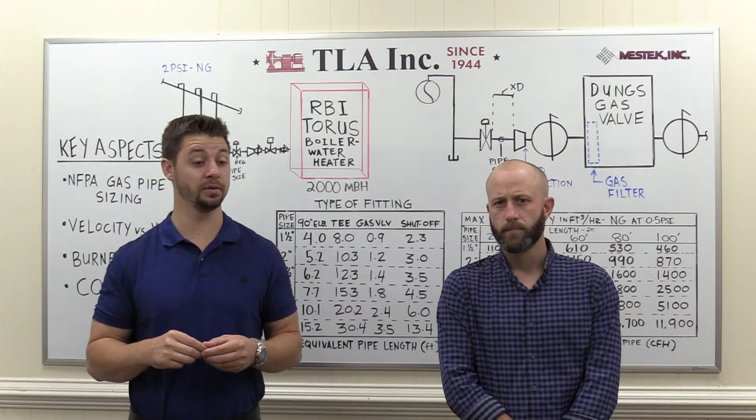We're here to have a quick discussion on some things to keep in mind with gas regulator location when it comes to boilers and water heaters, but also some things to keep in mind with gas pipe sizing and how some of that has an effect whether you have the regulator too close or too far away.

Some things to think about, and stuff that's provided actually on our IOM, are these tables and things that are provided even within NFPA. So we all have access to code and how we size gas pipe sizing, but I think sometimes we get led astray when it comes to equivalent pipe length.

So if we had a 2000 MBH boiler or water heater, we quickly can go to the table and say, hey, I have a 2,000 MBH input boiler. Okay, maybe I only need a 2-inch pipe size.

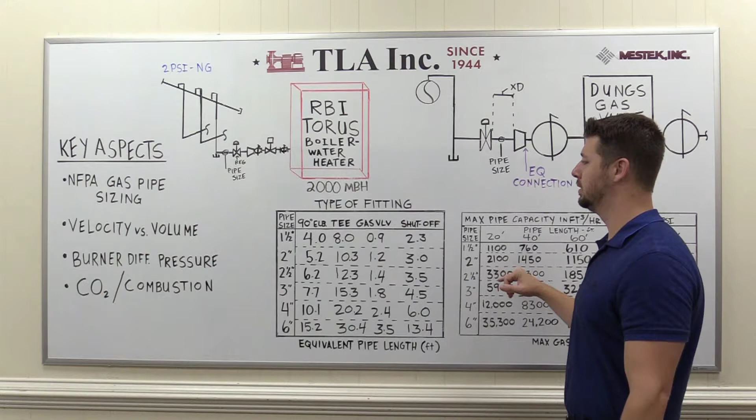But say you want to locate these regulators on the opposite side of the room, run it over, have a drip leg, and then run into the boiler. If we go to our tables, it's just something to keep in mind that we quickly think we only need a 2-inch pipe, but with these equivalent feet, a 2-inch pipe, we can quickly eat up equivalent feet, and we could quickly have to go to a 2.5, potentially 3-inch pipe size.

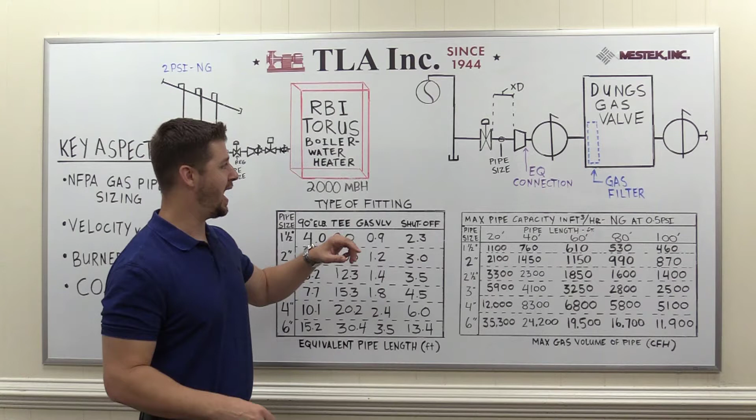Alternatively, if we put the gas regulator too close, there are some other effects that can have on our system, and Ken's going to quickly speak to how that affects things.

The way the Dungs gas valve works is a neg reg gas valve, so we have a blower pulling the gas and the air through the valve. So if we have our regulator too close, we could actually possibly starve that valve. That valve can handle 3 inches up to 14 inches of water column, but also can only handle about a 2-inch drop across that valve.

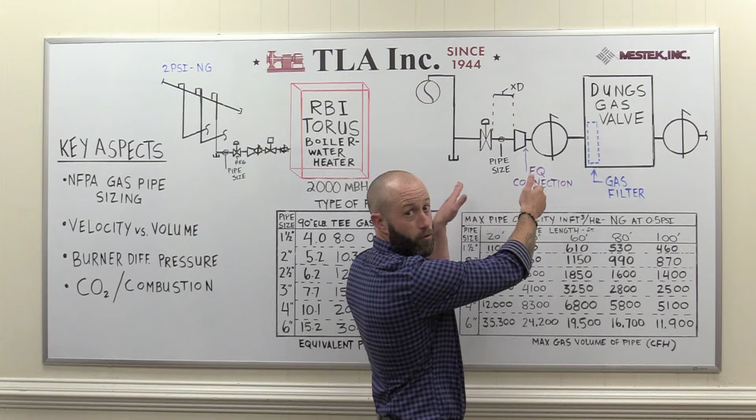So regulator location is extremely important, and what we recommend in the IOM is to be about 10 pipe diameters from the gas valve, so we make sure we have enough volume in that pipe in order to fire these boilers. These boilers typically fire between 30% and 40% firing rate.

So, like you said, keep in mind 10 diameters downstream of the regulator is what we want to see before we hit this gas valve.

Another thing to keep in mind is why that's also important: gas piping is traditionally pretty dirty pipe. It carries a lot of debris. I don't think the city of Richmond or anywhere else is cleaning their gas pipe or purging it. There's a lot of stuff that floats through.

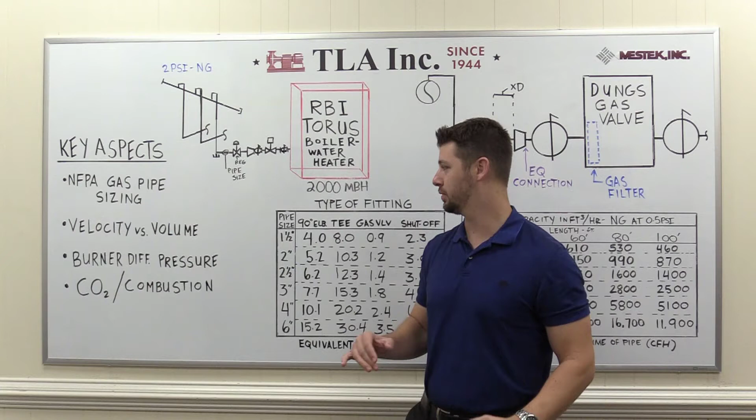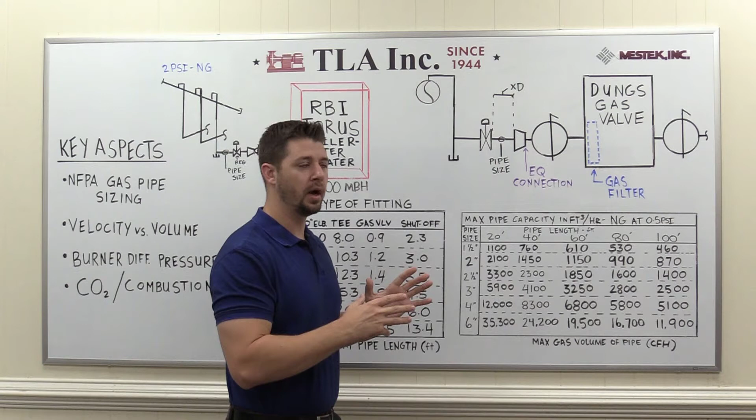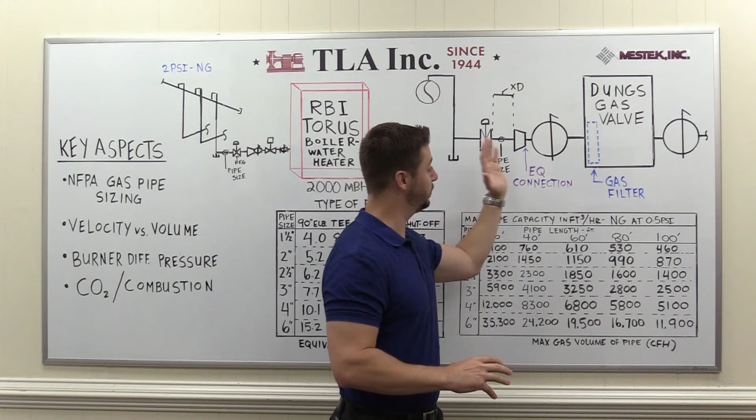So a lot of times in some gas regulators, we crank down on a spring, and when we have this regulator too close, what we're doing is making up volume with velocity. This regulator is trying to catch up quickly to what this gas valve wants, and what happens is we start increasing velocity. We start carrying debris downstream, and we can quickly plug up this very expensive gas valve.

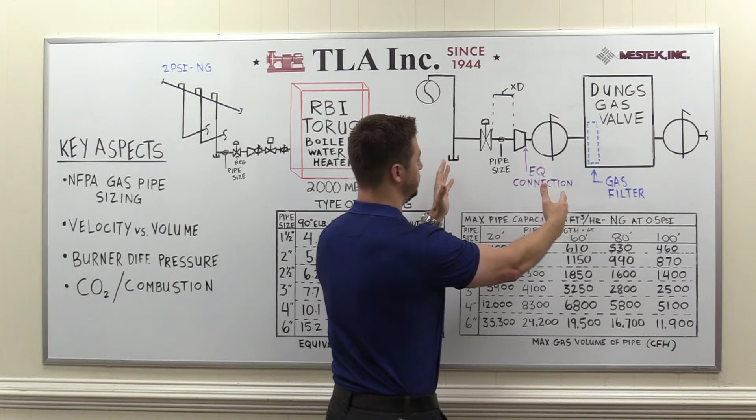Just another aspect to keep in mind of why we want so much volume, i.e. in terms of pipe diameter, downstream of the regulator before our gas connection.

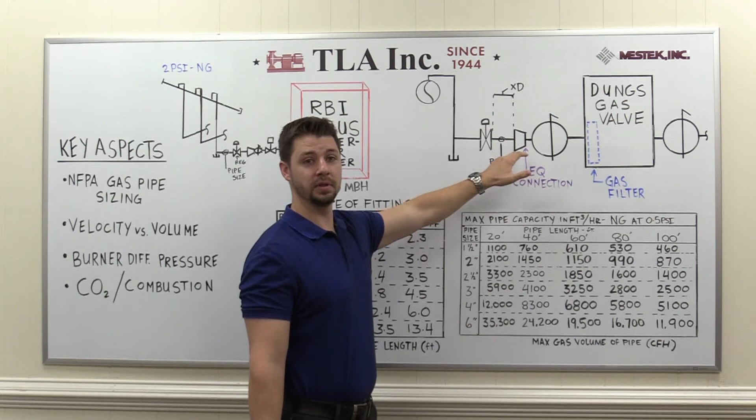Another thing to keep in mind: a lot of times there will be a reducer here because this is not sized per NFPA, but don't worry about that. Make sure you size that piping downstream of the regulator, or in general, per NFPA.